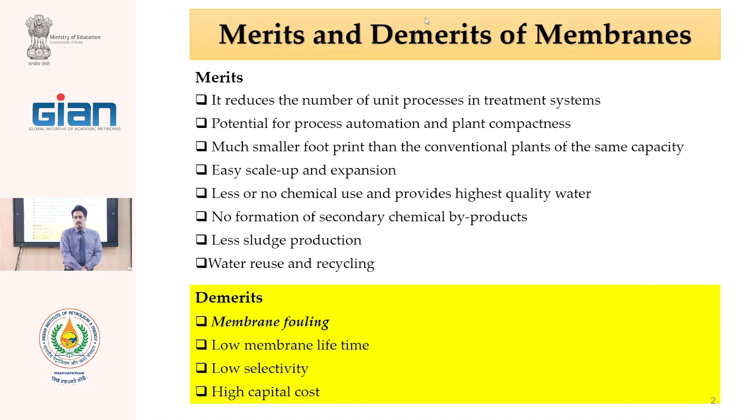Some plants change their membranes every 2 years, while similar plants in another city change membranes every 5 years, because the engineers at the 5-year plant have good knowledge about membrane maintenance and cost control of the conditions for reducing membrane fouling.

Therefore, we must learn about the mechanism of membrane fouling and try to reduce the fouling agents, named foulants - fouling agents that cause fouling. Generally, we have 4 types of fouling.

One is colloidal fouling, meaning the fouling agent is colloids and particles - particle fouling or colloidal fouling. Why say colloidal? Because we can separate big particles, while colloids are very small and charged particles. In some cases, cartridge filters cannot properly remove the small particles we call colloids, and therefore we can have colloidal fouling.

Colloidal fouling is important in microfiltration membranes, because in microfiltration we mostly separate particles, bacteria, yeast, or turbidity. Therefore colloidal fouling is important in microfiltration and ultrafiltration membranes, but not important in reverse osmosis, because we don't allow colloids to reach the RO surface. If they reach it, the RO membrane will rapidly be damaged.

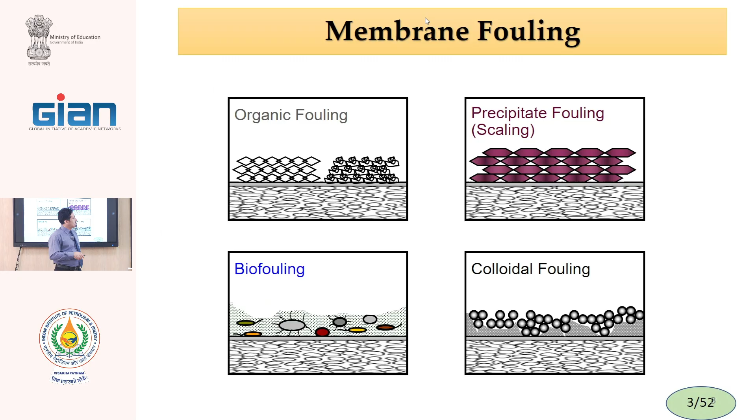This also shows another schematic about biofouling, inorganic, organic, and colloidal fouling. For porous membranes, we have different types of fouling based on the chemistry and size of the foulant and the pore size of the membrane.

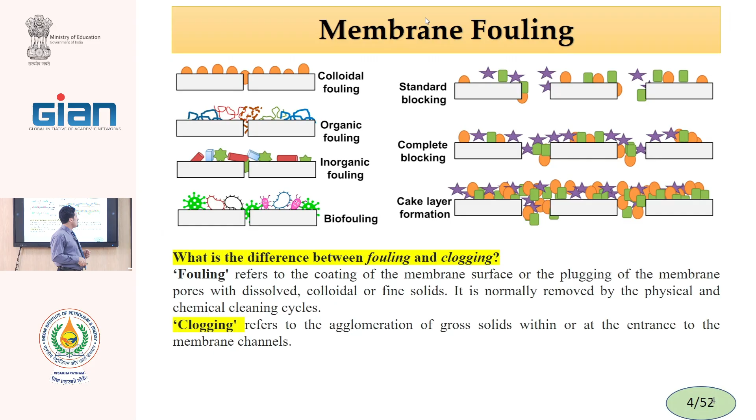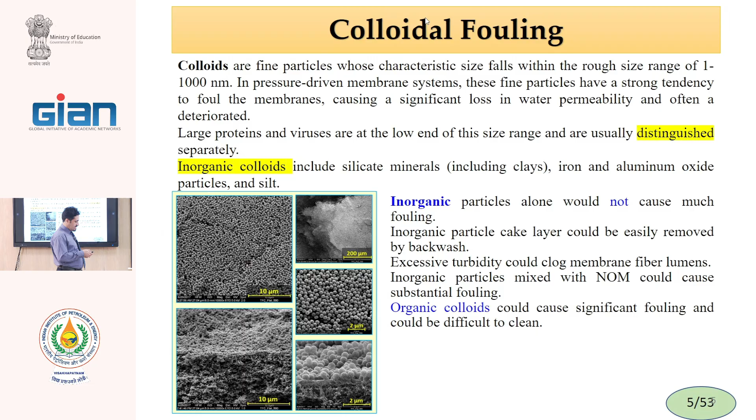This is an example of colloidal fouling. These photographs, SEM images, are given from the membrane surface with a fouled membrane. We see that particles cause an increase in membrane thickness, and we have a new layer that can cause a reduction of membrane flux.

From the seawater, algae produce alginate, and alginate fouling is very bad in the presence of calcium. When we have calcium in the water along with alginate, the calcium can act as a bridge between the alginate and cause adhesion - very, very bad fouling can occur when we have calcium with humic acid or natural organic matters, producing a layer like cement on the membrane surface.

Therefore, in the entrance of RO membranes, we must use TOC lower than 4 ppm. If we have a higher TOC than 4 ppm, we will have very bad fouling in the RO and NF surface.

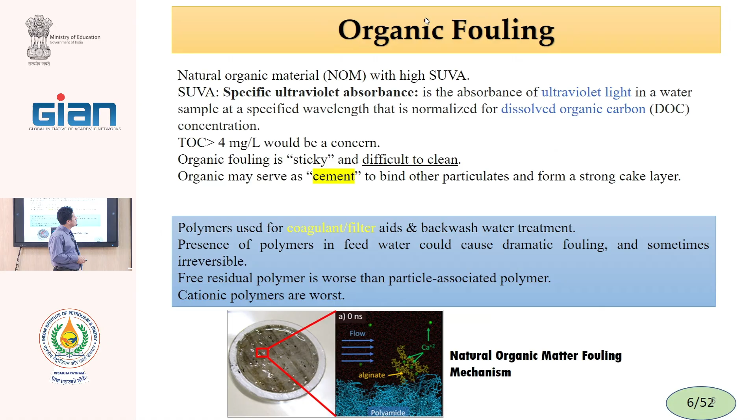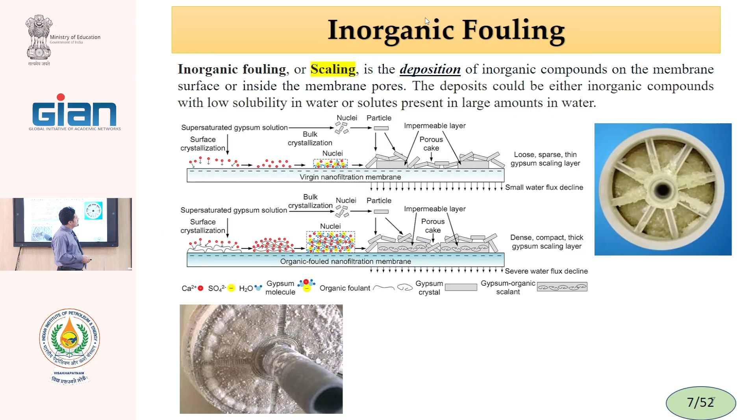Scaling mostly results from calcium and magnesium, but the presence of low amounts of heavy metals, especially zinc, nickel, manganese, iron, or aluminum, is also a factor. We have a coagulation process in water treatment.

In the coagulation process, we add Fe chloride or alum sulfate as a coagulation agent. In some cases, the possibility of iron and alumina in the feed is high, and this can cause rapid sedimentation of the inorganic layer because the solubility of these salts is lower. The complex of calcium and magnesium, for example with hydroxyl or sulfate, has low solubility, but the tendency of heavy metals for precipitation is high.

We usually have this KSP. We know each component that can precipitate has a KSP. The lower the KSP, the more negative the KSP, the more rapid the sedimentation behavior. We say that calcium carbonate, in comparison to aluminum, has more solubility. Aluminum hydroxide is very, very low in solubility. Therefore, when we have a very low amount of aluminum, phosphate, zinc hydroxide, or iron, the KSP is very negative.

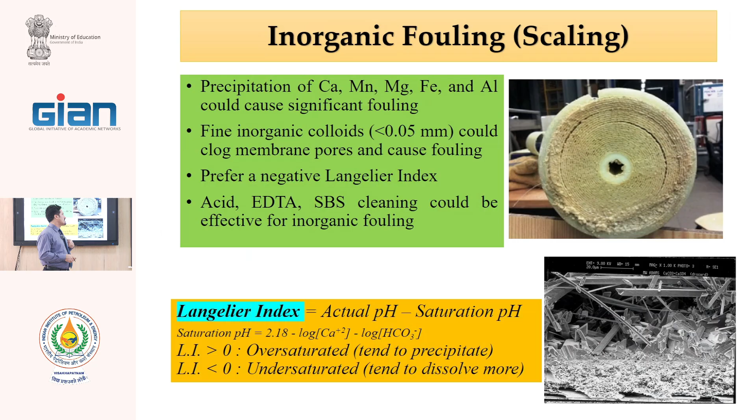Scaling layers can differ from one water source to another because the chemistry of water can be different, and there may also be organic fouling or microorganism biofouling occurring together. Therefore, comparing membrane surfaces, for example UCLA wastewater is different from Montana State University - this case I think has organic fouling together with inorganic fouling, but here we have only inorganic fouling.

We see good crystals, but in this case we see some polymeric change, maybe from alginate, lignin, and other natural organic matter. Therefore, based on the chemistry and water source, our routes and control can change. From one plant to another, the management of the system can be different, and the engineer needs to find the reasons for fouling problems and try to resolve them.

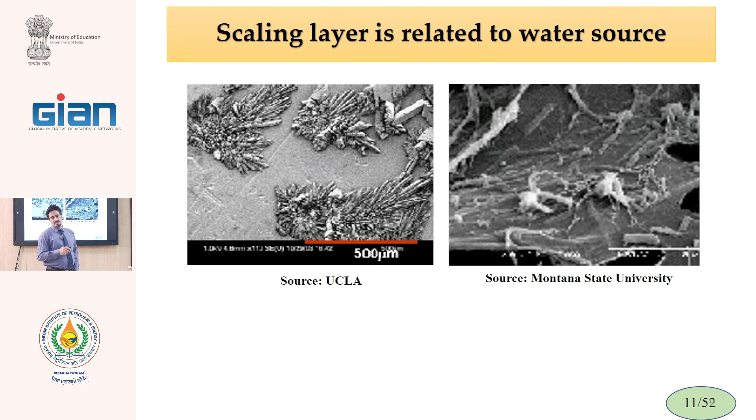For reducing scaling, after pH adjustment, we can use certain materials that reduce the scaling possibility. The famous ones are the phosphonate families - there are different types of these compounds we use. Other options include dendrimers, polyanions as polyelectrolytes, and others.

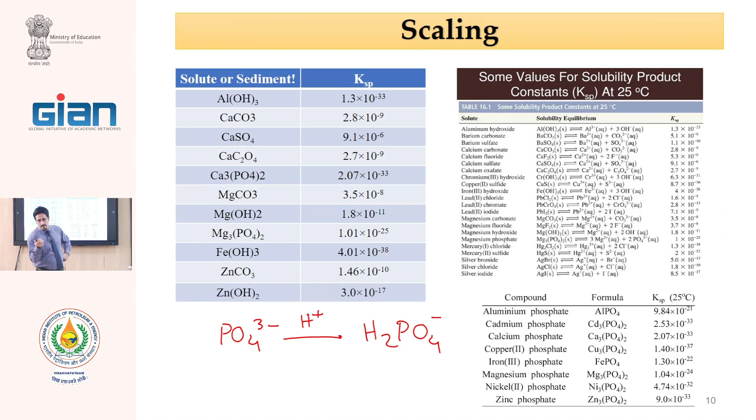Therefore, there is an interface. There is a competition between calcium ions for reaction with phosphonate, not wanting to react with carbonate or sulfate. The phosphonate-calcium complex is soluble, not insoluble. If calcium reacts with carbonate, it will precipitate.

If it reacts with phosphonate, it doesn't precipitate. Therefore, one mechanism is the change of KSP, causing a soluble complex. The second mechanism is that polyanions, polymers, and dendrimers can connect to these crystals where they are alone.

You see that after producing these crystals, they all connect together and produce bigger particles, or produce a layer on the membrane surface. In this case, with most polymers, the polymer connects to the produced crystals and does not allow more growth.

After nucleation, the crystal begins to grow over time. But these polymers connect to the small particles and do not allow growth. When there is no growth, the cross flow velocity of the fluid, after a certain time, can pull and remove them from the RO modules. Therefore, the attachment of the crystal can be reduced with some polymeric anti-scalant, and there are many mechanisms for that.

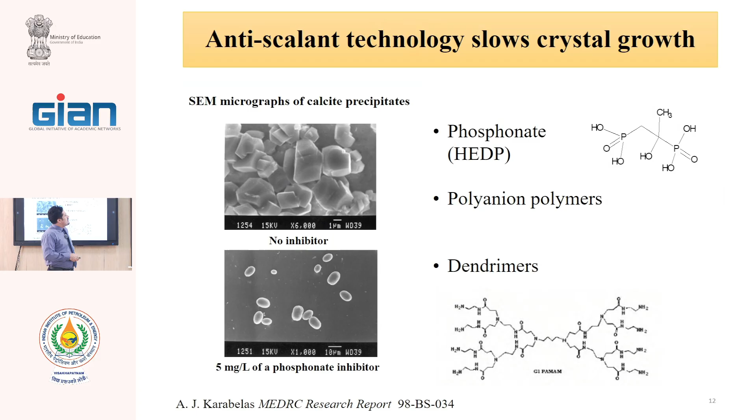Therefore, the growth of crystals, the reaction between calcium carbonate and calcium sulfate, is a chemical reaction with thermodynamic and kinetic parameters. With changes in temperature, the growth rate can change. In this case, we see that increasing temperature is bad for the membrane from a fouling point of view, but we know that with increasing temperature, the flux can be increased. We have a trade-off: increased temperature is good for flux but bad for gypsum scaling.

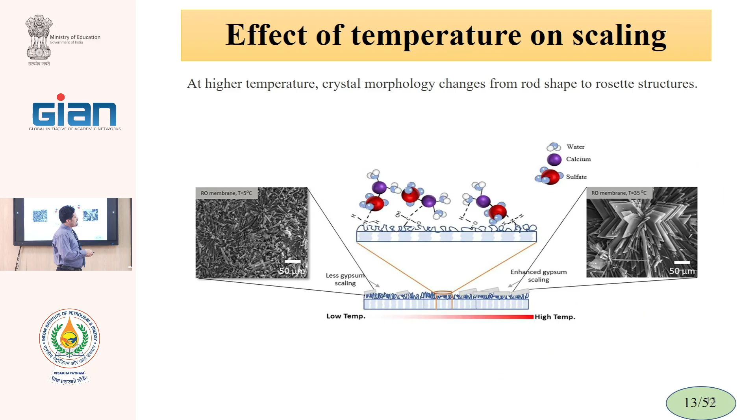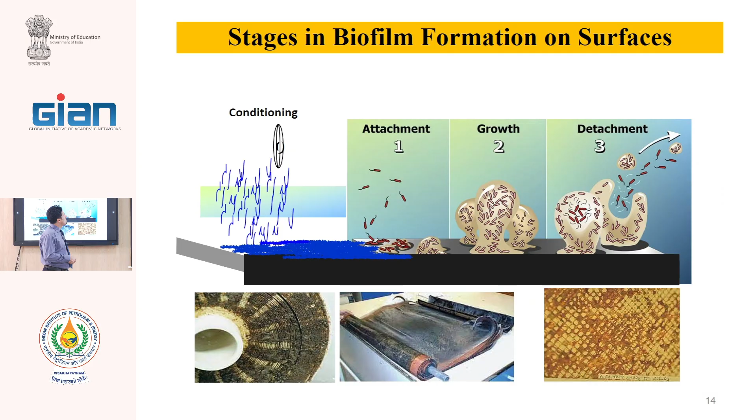Biofouling is bad fouling because bacteria and microorganisms grow very rapidly. During one day, the concentration can increase 3 times. Therefore, if we have microbes or microorganisms on the membrane surface, they can rapidly grow and form big colonies. This shows that when microorganisms reach the RO membrane surface due to bad performance of sand filters and cartridge filters, within maybe one month, the membranes are completely destroyed, and the color of the membrane changes from white to dark brown. Therefore, biofouling is very bad fouling and can grow rapidly.

As we said in previous lectures, for increasing recovery, we usually have 5, 6, or 4 modules inside the pressure vessels. We have long pressure vessels. We put 6 modules, each module is 1 meter, so this pressure vessel is usually 6 meters, because between each module we have a free space of about 10 centimeters.

In this slide, we say that fouling is also related to the location of the modules. We have the feed entrance here from the left, and from the right, the concentrate exits. We have 6 modules. In the first module, we have mostly organic fouling.

If the feed has organic matter, most organic foulants attach to the membrane surface in the first module. As the module absorbs the organic foulant, its concentration is reduced. In the last module, we have very low organic foulants because most are adsorbed in the first one.

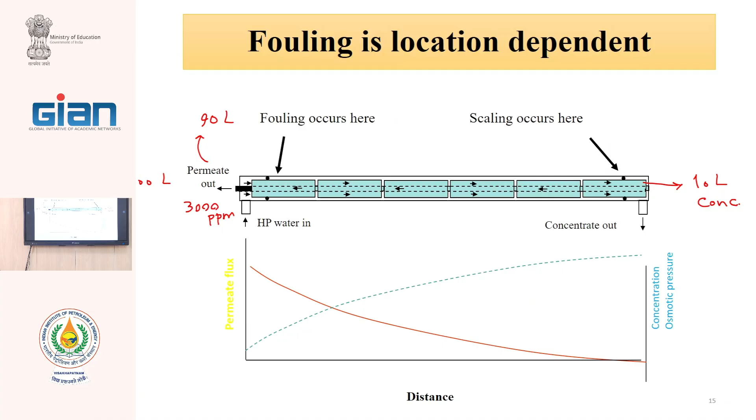The concentration of salt in the feed is 3,000 ppm, and we assume 100% complete rejection, usually 99%, we assume complete. That means all of the salts will go into the 10 liters. Therefore, in this case, we will calculate the resulting ppm of salt in the concentrate.

The permeate is pure, distilled water, no salt. All of the salts from 100 liters go to the concentrated solution. Therefore, concentration will be increased from 3,000 to 30,000. We have a very possibility of saturation, 10 times we have a thicker solution. Therefore, in the last modules, we will have a possibility of scaling because going to the right, the concentration of the salt increases.

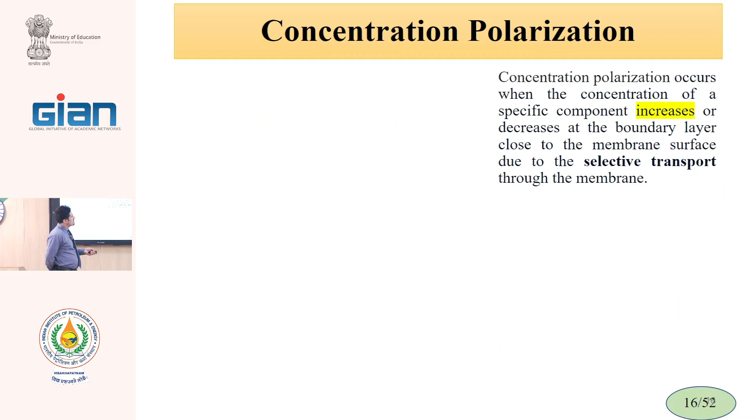Change the location of the membranes for long life. The main reason for fouling begins from the concentration polarization. As we know, the concentration of the solutes, the molecules, from the bulk to the concentration polarization layer is different. As yesterday, Dr. Raka gave some solution problems for you. In the first problem, it said the concentration of the molecules is 25 times higher than the bulk.

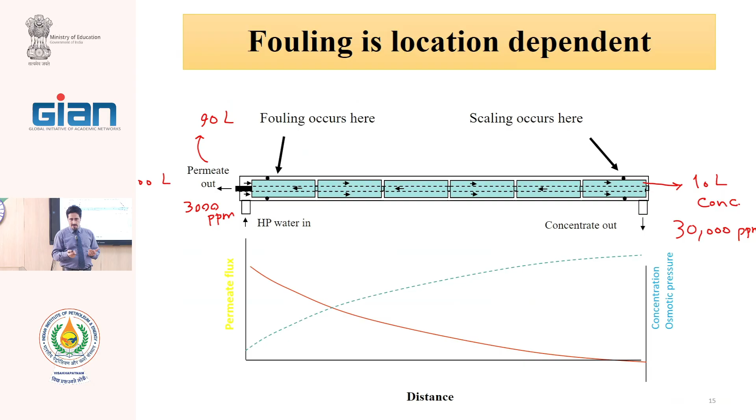In the previous slide, we said the concentration of the feed is 3,000 ppm. This concentration is in the bulk. We measure the bulk, we cannot measure the surface. Therefore, we actually have the concentration of the salt in the membrane surface may be 6,000, 7,000. Therefore, this concentration polarization, because it increases the concentration of pollutants on the surface, causes the fouling.

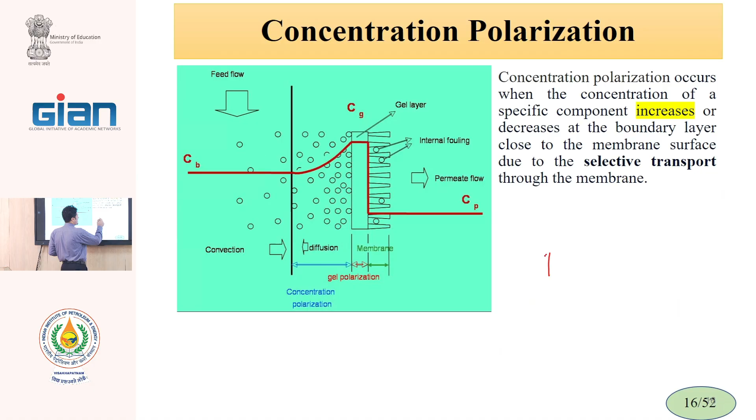Therefore, stirring is very important on the membrane surface, and we try to have a turbulence fluid regime on the membrane surface. We must have a Reynolds number bigger than a certain amount for turbulence, usually more than 2,300 on the membrane surface, and the feed speed is very important in the spiral wound module. When we want to buy a module, one of the parameters in the brochure of the membranes is the feed speed at entrance. Every higher feed speed gives us a bigger Reynolds number.

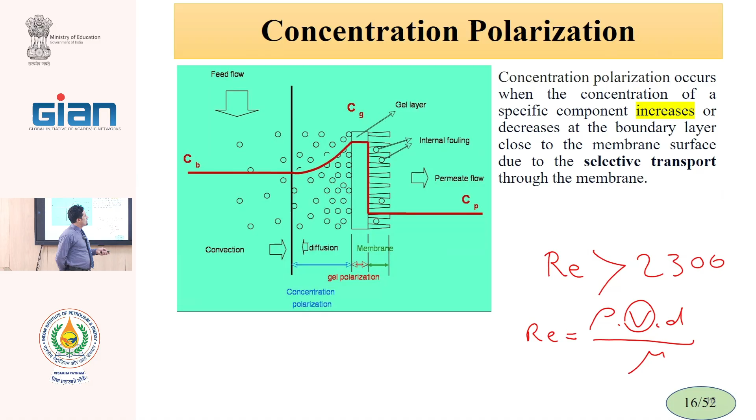Therefore, in the brochure, in the catalog, they say maximum feed speed, and this module should be tested at maximum feed speed. We want to increase the speed, but maybe the module can be degraded.

There are different resistances in the membranes that we can calculate using filtration of the proteins, as I discussed yesterday. We test with pure water, foulant, and second water pass, and we get different types of resistance. The first one is the membrane intrinsic resistance. When we have pure water flux, we know that big pores in the membrane mean low resistance. When we reduce the pore size, the flux reduces, which means the resistance increases. Therefore, we have an intrinsic resistance related to the membrane chemistry and membrane pore size.

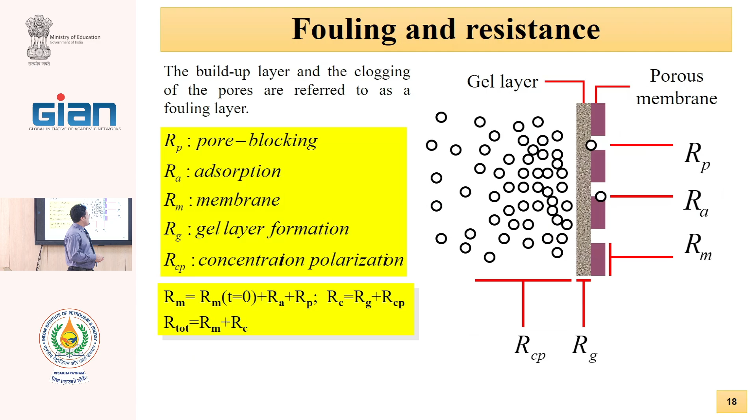We have an adsorption resistance, a standard resistance that can reduce the pore size. We have a gel resistance or cake resistance. We have a concentration polarization resistance, which is the difference in concentration. We have a pore blocking resistance, meaning the pores are completely or mostly blocked. Based on the flux, we can calculate these using equations, and this is the routine method.

Yesterday I discussed that we can obtain the flux recovery ratio by measuring the second flux compared to the first flux, giving reversible fouling and irreversible fouling, based on the BSA flux, we can obtain these values.

In this slide, I try to define fouling. For reducing fouling, we have three general techniques. One is pretreatment of the feed. We can identify and characterize the fouling agent, the fouling reason, and remove it or reduce it. This is the best method, because we can control the fouling agent.

For example, using sand filters, carbon filters, and different cartridge filters for removal of particles and colloids. Using carbon filters to adsorb heavy metals and organic substances. Low concentration chlorination to prevent microorganism growth, we use about 1 ppm chlorine dosing in the feed water of RO. This chlorine as a disinfectant does not permit the growth of microorganisms, but as I said before, this chlorine can cause degradation of the membrane in RO, and one area of research is increasing chlorine resistance of RO membranes.

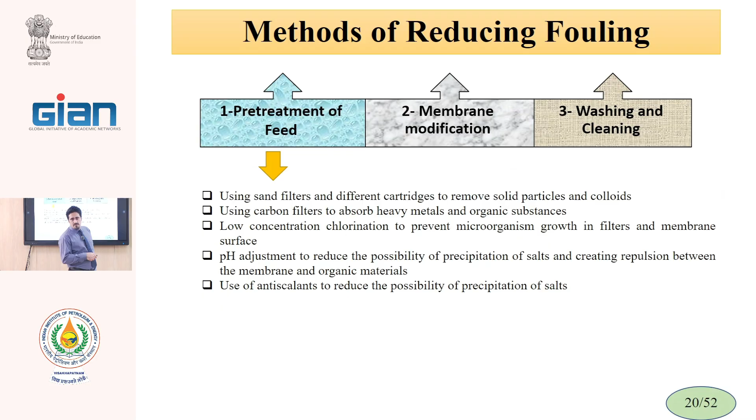Another method that we do not act on this way is washing and cleaning. When our membrane is fouled, with washing and cleaning we can recover it.

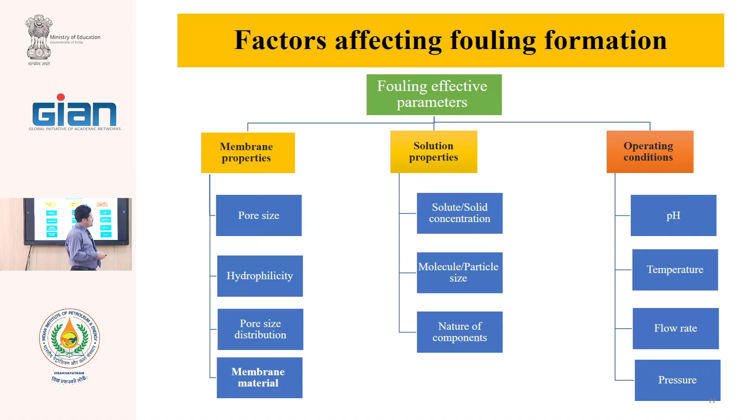So this is the cause parameter, and I discussed them with some examples in another slide. For pre-treatment of the feed solution, heat treatment, for example.

With increasing heat of the feed in the dairy industry, we can reduce membrane fouling. Fat in milk at cold temperature rapidly causes fouling, but with increasing temperature, the oil and fat fouling can be reduced. Other methods include pH adjustment, anti-scalant, chlorination, and others.

For membrane properties, as I said, we can increase the hydrophilicity of the membrane or control the pore size.

For module and process conditions, I discussed turbulence promoters, which increase mixing on the surface and reduce concentration polarization.

For turbulence, we usually use two methods. One is increasing the speed, but we have a limitation, a max speed. The second is using baffles.

Baffles or promoters - when we use a feed spacer in the module, between membranes we use a feed spacer for passing the feed. The configuration of this feed spacer is very important and closely related to turbulence.

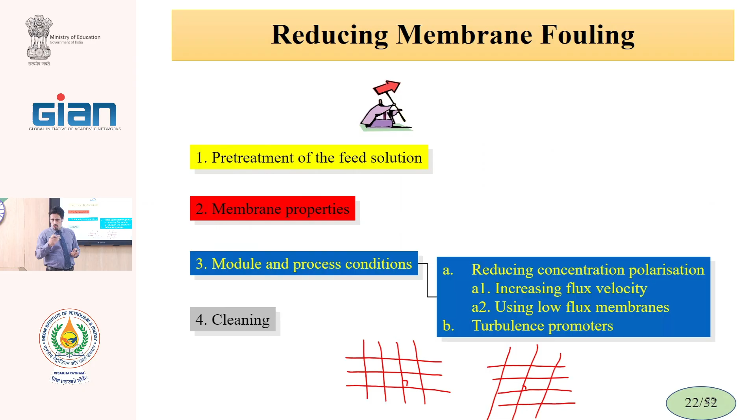With a change of this angle, the turbulence can be changed. Therefore, the design of the module can be very important in membrane fouling.

If our membrane is fouled, we have hydraulic cleaning, meaning washing only with water. Mechanical cleaning uses ultrasonic or bubbles for cleaning. Chemical cleaning uses chemicals such as acid, base, or surfactant.

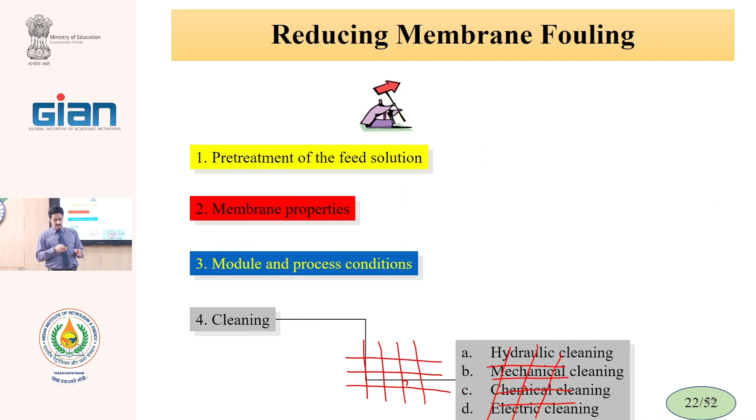Electrical cleaning - in some cases we have an electrical field outside of the pressure vessel, and induction of the electrical field to the cations and anions reduces the fouling. This is electrical cleaning for fouling.

As a second approach, membrane modification - there are many methods for improving the anti-fouling properties of the membrane. One method is improving hydrophilicity for MF, UF, NF, and RO membranes.

In this case, one famous method is grafting hydrophilic monomers, macromolecules, or polymers onto the membrane surface, producing brush membranes.

This brush does not permit attachment, and it also has movement - the movement of the feed velocity can separate attached molecules from the surface and reduce the attachment of foulants to the membrane surface.

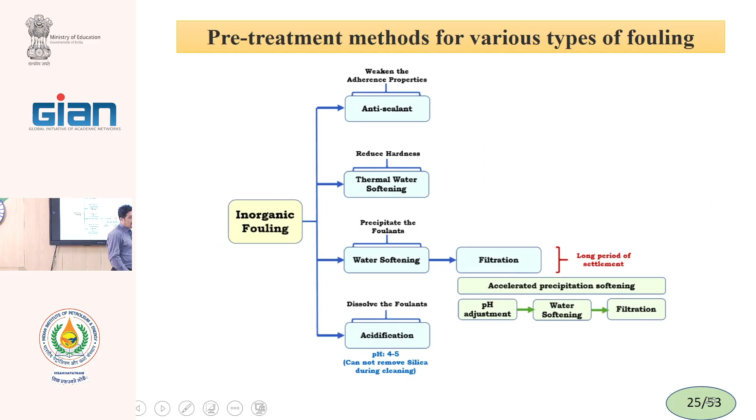In this slide, I show some pretreatment methods for reducing inorganic fouling. As we said, we can use anti-scalant. We can remove calcium and magnesium as a softening agent. We can use acidification to decrease the scaling potential, or we can use thermal water softening, such as distillation, for reducing scaling.

For organic fouling reduction, we must remove the organic agent. The most commonly used process is coagulation, with the addition of aluminum and iron salts to water and use of calcium hydroxide. This produces precipitation that adsorbs the organic matter and removes it from the water.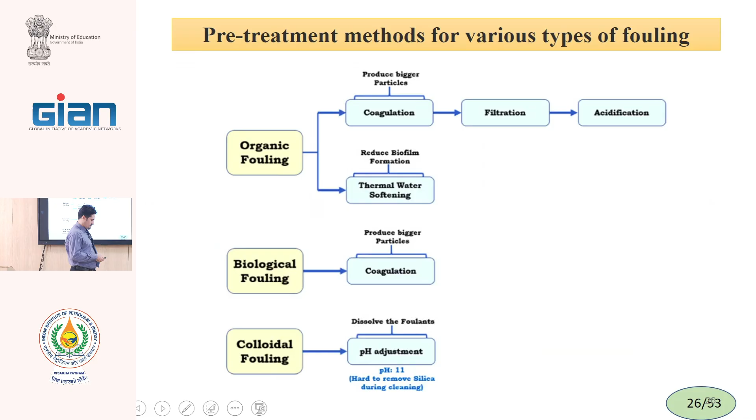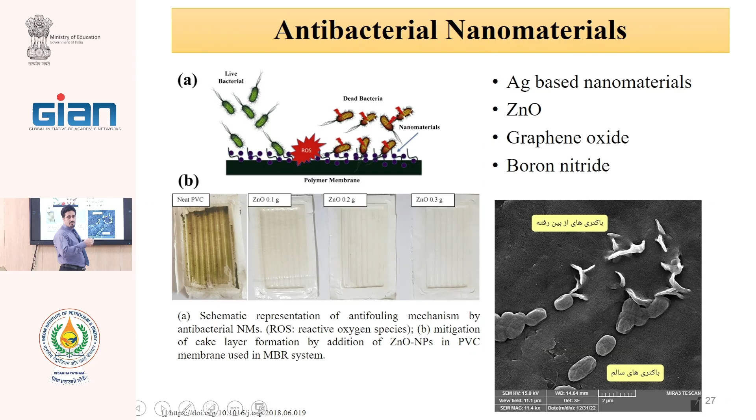When we have an antibacterial agent, we see this is the live bacteria, and this is the destroyed bacteria. The cell membrane of the bacteria can be destroyed. In this example, a neat PVC without antibacterial agent shows growth of microorganisms, but with addition of a low amount of zinc oxide to the PVC, the surface is very clean. This shows that we can produce antibacterial membranes.

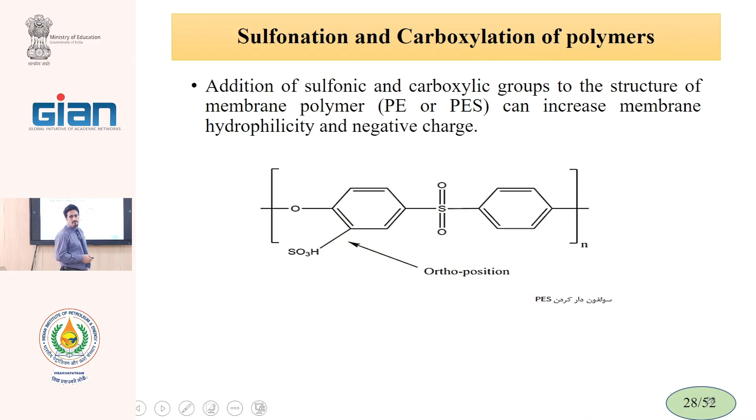For increasing hydrophilicity, we can also modify the main polymer. When we have a polysulfone, with addition of functional groups such as sulfonic, carboxylic, or hydroxyl groups, we can increase the membrane permeability and antifouling properties.

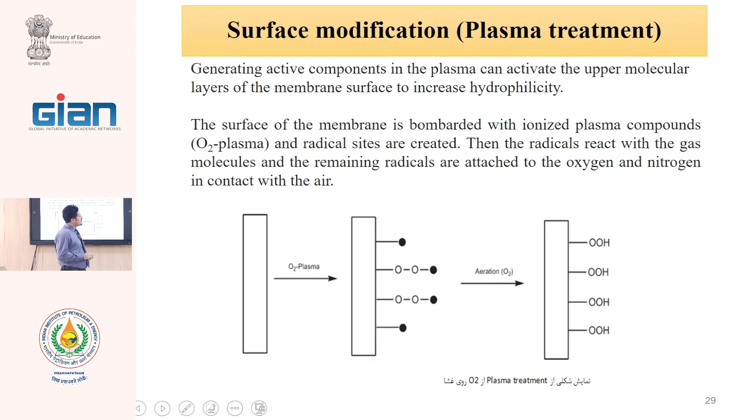For production of these groups, there are different methods. One is plasma treatment - oxygen plasma can produce radicals and cause a hydrophilic surface on the membrane surface. Or with production of copolymers made from two different polymers, combining a hydrophilic polymer with a hydrophobic one, we can increase the hydrophilicity of the membrane.

In this research, when 10% ethylene oxide is inserted into the polysulfone structure, we see that the permeate is very, very increased.

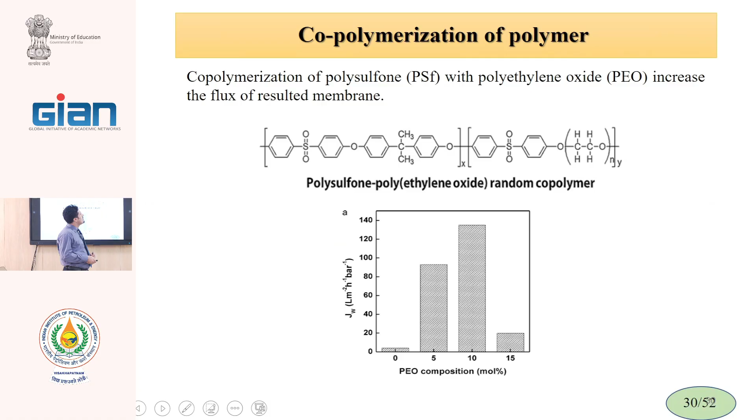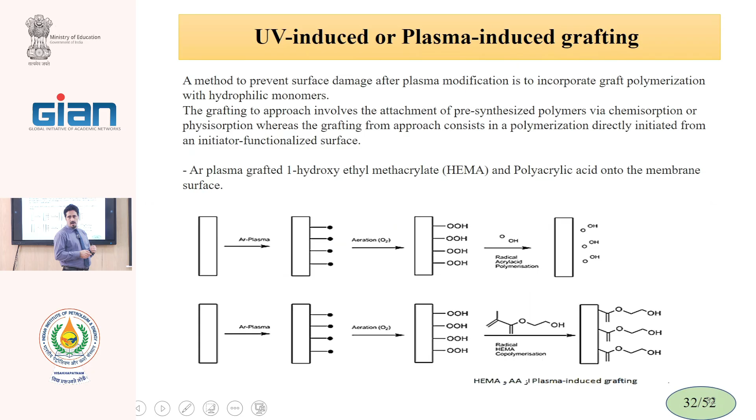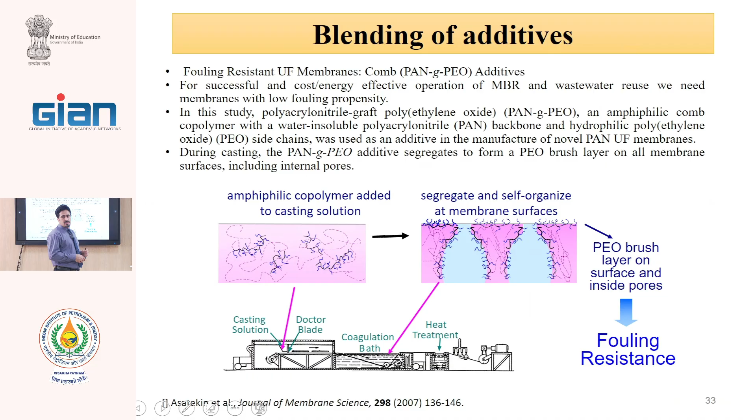Blending of hydrophilic additives can locate on the surface of the membrane and inside the membrane, causing a decrease in fouling attachment.

For cleaning, we have physical cleaning that uses water as hydraulic cleaning, or mechanical cleaning with use of ultrasonic and bubbling and others.

Usually physical cleaning takes a few minutes in industry. For cleaning with acid base washing, we usually use 1 hour. For mechanical and physical cleaning, we use 5 minutes because we want the water to wash the membrane surface. But in chemical cleaning, we need time for reaction between the cleaning agent and the fouling.

For example, we want to remove scaling. When we use acid together with EDTA, the acid and EDTA should react with calcium carbonate and calcium sulfate to dissolve it, and dissolving needs time. Therefore we usually use 1 hour - we do not use more than that because more contact causes damage to the membrane. Rapidly after cleaning, we use water to remove the cleaning agent.

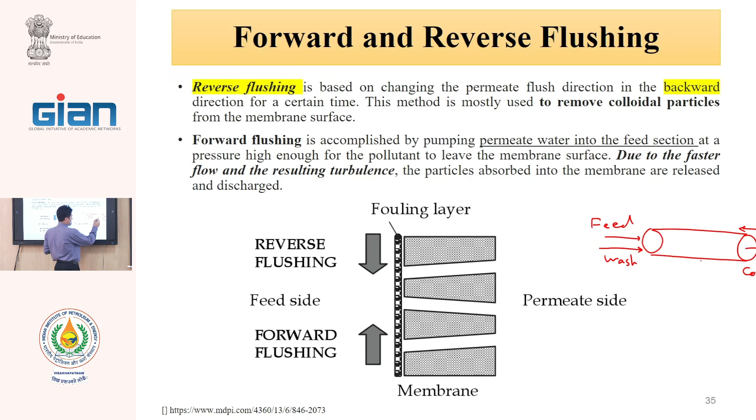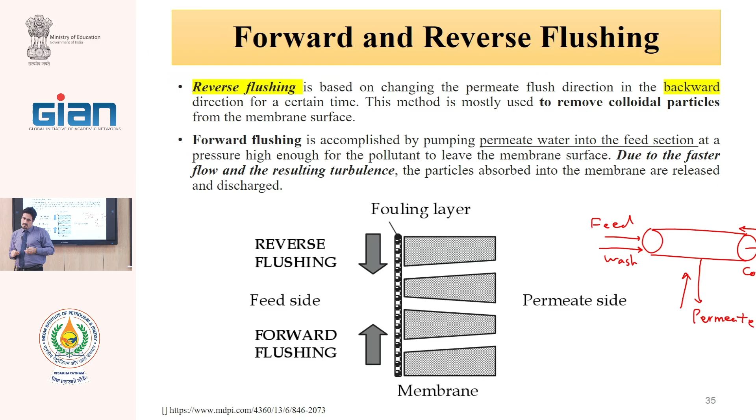But in reverse, we have washing from the concentrate side to the feed side. In backwash, we use washing from the back side. So: forward, reverse, and back flush - this is the back flush.

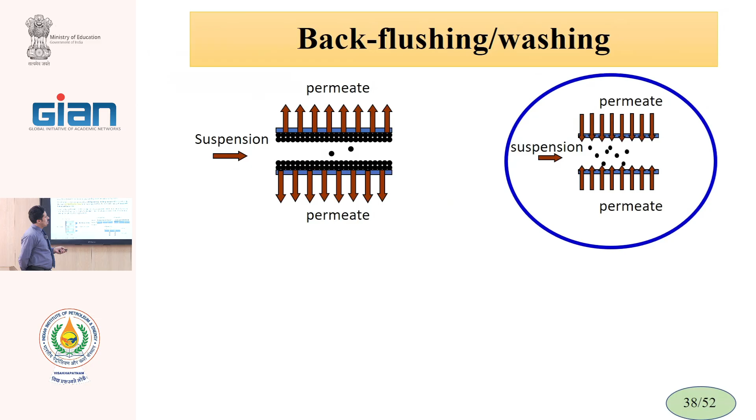For washing and cleaning, we measure the pressure drop or flux drop. Our flux, for example, is 100. When it reaches 50, we say our membrane should be cleaned. This time may be 1 day for UF or 6 months for RO.

After reaching this critical point, we must wash the membrane. But with washing or cleaning, we usually do not reach the first flux again, and the flux is lower than the initial flux. After another period, we wash again, and we repeat this process. After 5-6 times for RO membranes, or 1,000 times for UF membranes, the recovery of flux is very low, and we must change the membranes.

This diagram is for flux, and this diagram is based on pressure. In industry, we want to produce a product, and the product capacity should be constant - we want every day to have 100 liters of product.

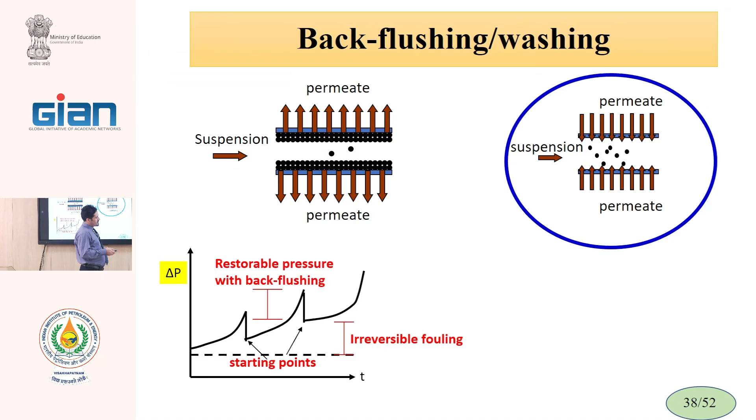Therefore, in industry, this method is mostly used for finding the backflushing time. By keeping and increasing the pressure, we have constant productivity.

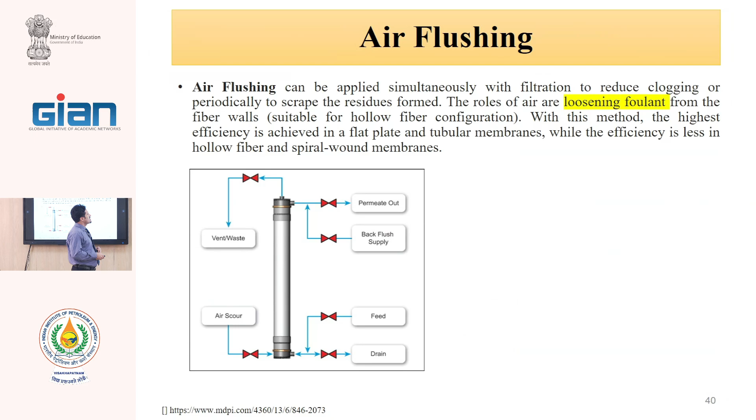As a mechanical washing method, we can have a bubble flow from the water, and this bubble can increase membrane cleaning, named air flushing. We can also use ultrasound. Ultrasonic can produce very small bubbles and can cause detachment of the pollutants from the membrane surface.

Finally, if our fouling is very bad, we have to use a cleaning agent. We have two types of cleaning: clean in place and clean out of place. Most cleaning is clean in place, meaning we do not remove the module from the pressure vessel. Instead of feed, we insert the cleaning agent, or in backwash we insert it from the permeate side.

In cleaning in place, namely CIP, we use the cleaning agent in that place, but in very bad fouling cases, after using CIP the flux does not come back. In these special conditions, we take out the modules, go to the lab, and test different chemicals there to recover the modules.

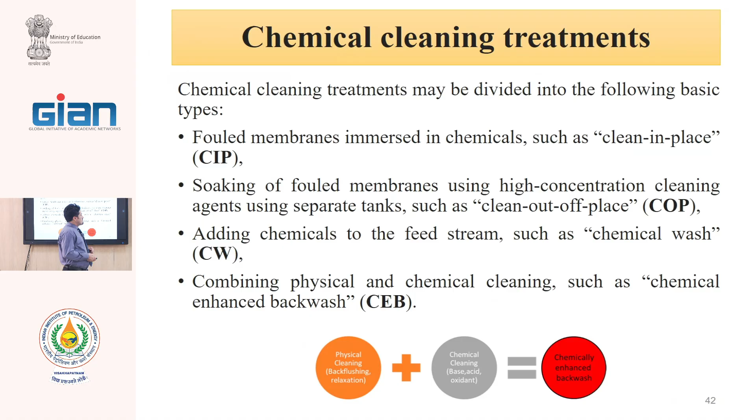and natural organic matter or synthetic polymers like polyelectrolytes, the best chemical agent is sodium hypochlorite. Sodium hypochlorite can be produced from the reaction of NaOH with chlorine. This is a strong oxidizing agent and can oxidize organic matters. All three—biological, NOM, and synthetic polymers—are organic matter, and organic matter can be well oxidized with

hypochlorite. Or we can use another oxidant, hydrogen peroxide. Hydrogen peroxide is expensive, but hypochlorite is cheaper. And for natural organic matter, we can use NaOH.

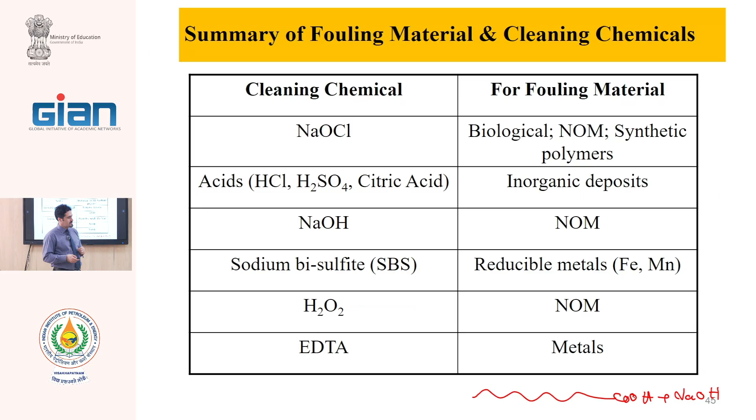For removal of manganese and iron that is high in well water, sodium bisulfite as a reductant agent is good. Hydrogen peroxide and hypochlorite are oxidants; SBS is a reductant. By reducing the iron, it can be removed from the membrane surface. This table is good for selecting a good cleaning agent.

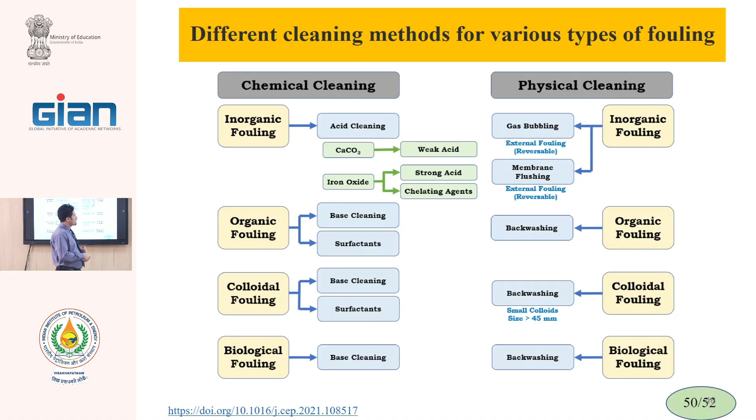The parameters that affect cleaning: first, the chemistry of the cleaning agent, which we discussed in this table, but the cleaning time is also important—sometimes 30 minutes, 1 hour, 2 hours, depending on the chemicals. Temperature is important; we can increase the temperature of the cleaning agent to increase the reaction velocity. The concentration of the cleaning agent is important too. In some cases we use acid at pH 1, sometimes pH 2, and with change of pH the concentration changes. The concentration of EDTA is important as well.

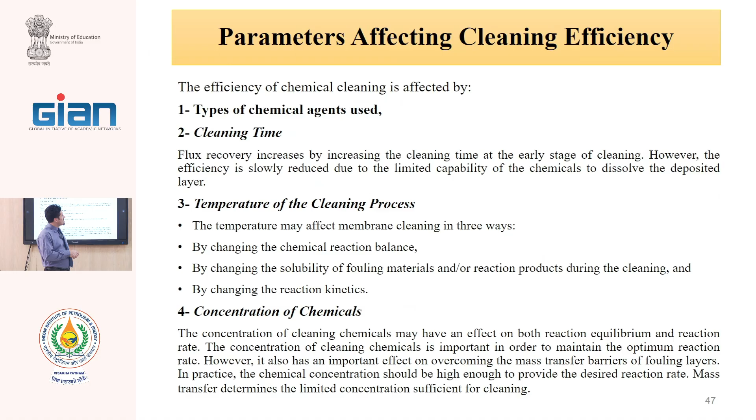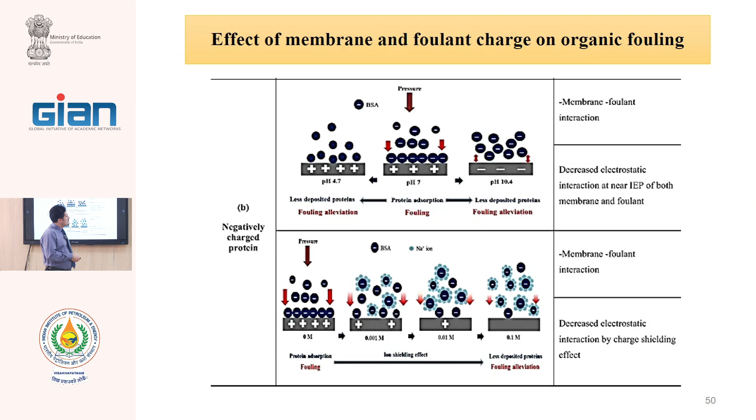No need for that, thank you. If I have any question, what about it? If any question about the cleaning or fouling. So, what is sponge cleaning?

What is it? Sponge in mechanical cleaning—sponge ball, yes. It is mostly used for some hollow fiber membranes and plate and frame membranes. We cannot use sponge balls in spiral wound modules because they cannot enter the membrane, but in plate and frame membranes we can use them, and in some hollow fiber membranes we can use them too.

What is the mechanism, how does it work? I do not understand your question. What is the mechanism, how does it work? The mechanism of sponge ball cleaning is mechanical—such as washing dishes. We have a sponge that comes through and mechanically removes the fouling.